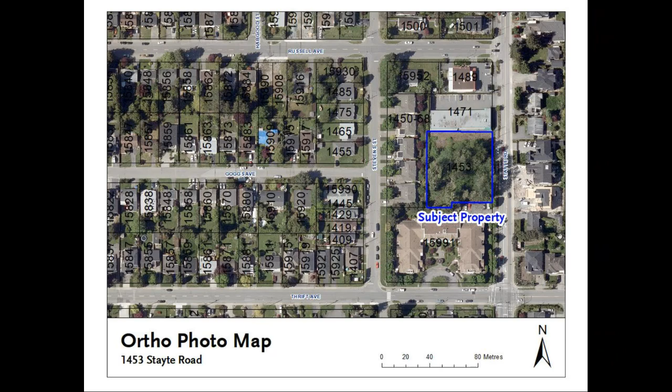The project has a bit of history to the proposal. There was previously a 4-story apartment-style building proposed on the site with, I believe, about 50 dwelling units. That proposal required a zoning amendment, which was ultimately not supported by council, and I believe the applicants will go through the specifics of that project in more detail. The application now is for a 23-unit townhome development with 2 parking spaces per unit, plus 3 visitor spaces.

As a quick snapshot of some of the details, the subject property is within the Urban Neighbourhood land use designation of the official community plan. Within that designation, the OCP recognizes low-rise apartment-style buildings as well as townhomes. It also recognizes density of up to 1.5 FAR, or floor area ratio, in buildings up to 4 stories in height.

The current zoning of the property is 1-unit residential, or RS1, and the rezoning application would create a property-specific comprehensive development zone. In addition to the rezoning, the project is subject to a major development permit, which requires consideration of the applicable development permit area guidelines, which help regulate the form and character of the project overall.

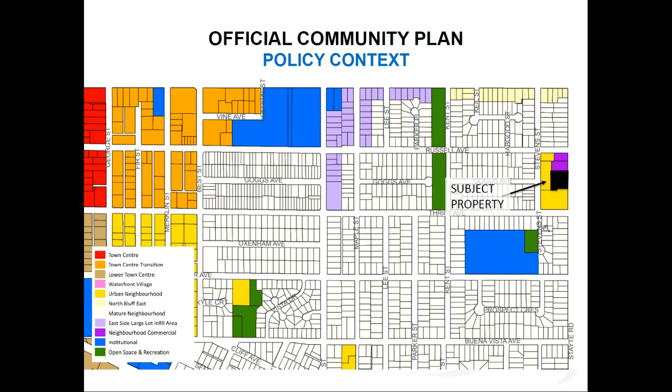This image gives you an indication of where the property is, again off of Stayte Road, north of Thrift Avenue and south of Russell Avenue. You can see it illustrated there in black, but underneath the black is actually the yellow land use designation, which is the Urban Neighbourhood land use designation of the official community plan. This designation is intended to support higher density forms of housing than what you might see around the periphery and the lower profile mature neighborhoods that are more characteristically comprised of single detached homes.

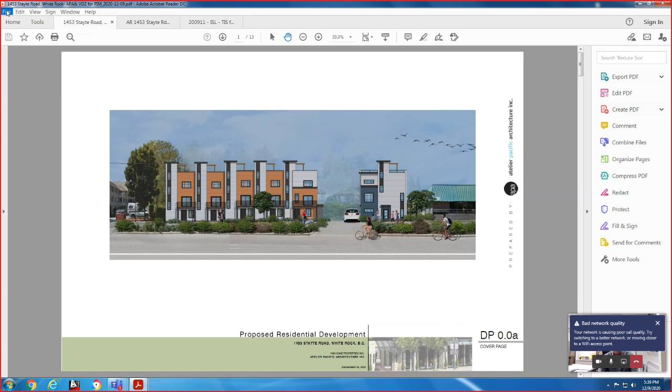Well, thank you everybody. We have representatives from Vanhome Properties, the developer and applicant, as well as Gloria and myself from Atelier Pacific Architecture, and Travis Martin from the Landscape Architecture Company. Let me go to the next slide.

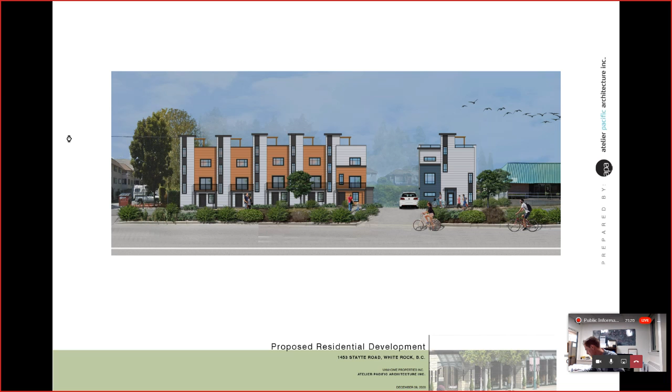There's the next slide. So this slide is just showing the previous application as well as the current, and a comparison between the two. The previous application, as was mentioned by Greg, was a 4-story condo building with an underground parkade, with an entrance off of Stayte Road. It was an L-shaped building with an outdoor courtyard green space in the southwest corner. The project height was 4 stories, 45.5 feet, measured from lowest grade.

That compares to the current proposal of townhouses, which is a 3-story element of 33.8 feet, with a rooftop deck proposed for each of the units. There's a stairwell that goes to the top, with a height of 39.5 feet. There were 50 units proposed for the condo building, and the unit density has dropped down from 62.7 to 29, now down to 23 townhouse units. The townhouse units all have side-by-side garages, and we're also proposing three visitor parking spots.

The floor space ratio allowable was 1.5. The original project was 1.41. The current proposal with the townhouses is under 1, at 0.96, a differential of about 1,400 square meters in buildable area.

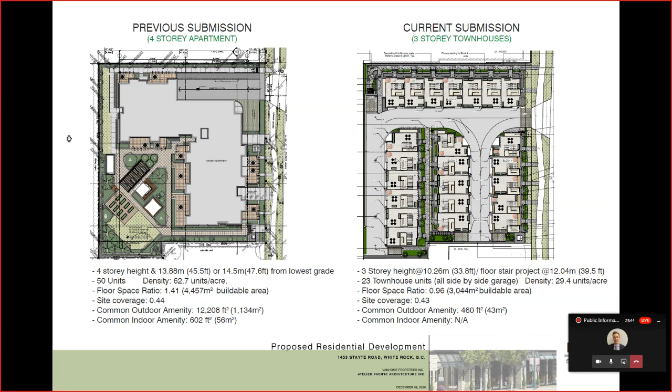The previous one had about 600 square feet. This was an option we did after the application, in response to some concerns from the neighbors to the west. We did have rooftop decks on all the blocks, but we're proposing to move the rooftop decks for block 3 back towards the east, which reduces the sound impact on the neighbors as well. The stairwells actually act as a bit of a block to sound.

This is just a quick site section showing what's happening with the site grades and the building mass. They are 3-story townhouses with one element, the stairwell, to access the roof deck above for exiting. At the property line there's an existing hedge on the property to the west, and our proposal augments that with a fence and an additional hedge.

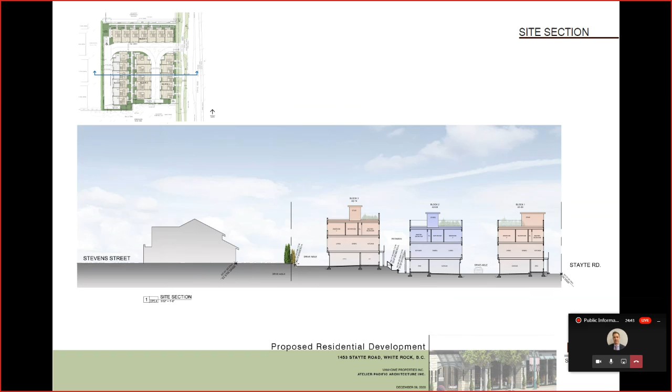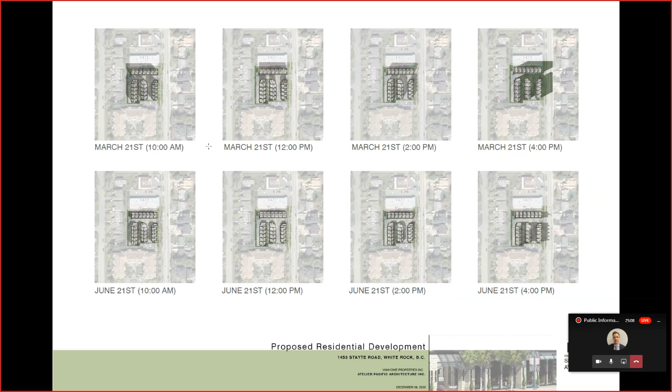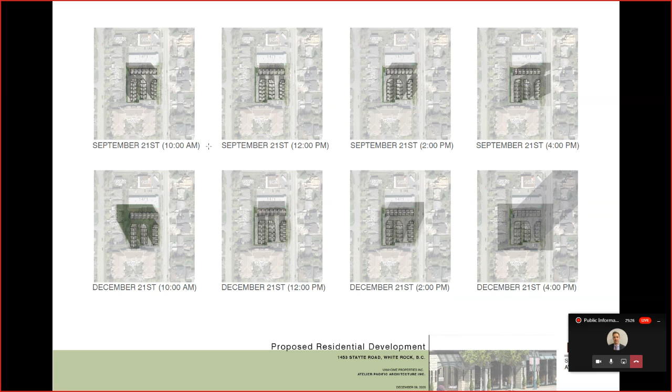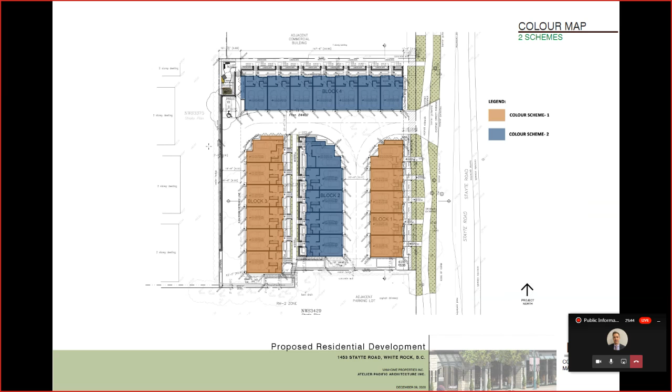This is just to indicate the color schemes. There are two proposed: blocks 1 and 3 have color scheme 1, more of a natural wood tone, and blocks 2 and 4 have the blue scheme. This is color scheme 1. All the materials are cementitious board and painted, so they're a durable, non-combustible finish that can be painted to any color scheme. The massing you can see is 3 stories.

You can see, for example in the west elevation, the garage doors, and then the 2 livable levels on top of that, plus the rooftop decks. There's a bit of a trellis element as well.

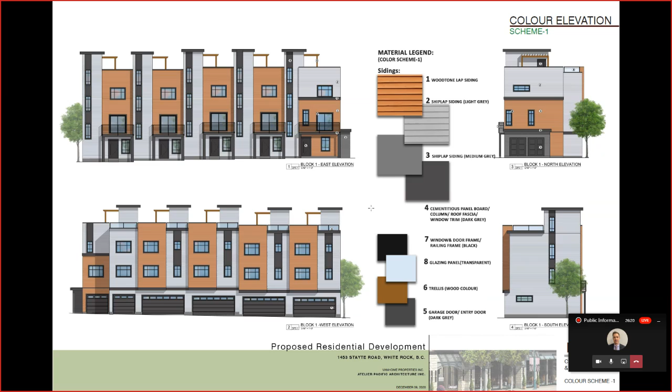And this is color scheme 2, using blues and grays. There's primarily 3 body colors with some trim colors added to that.

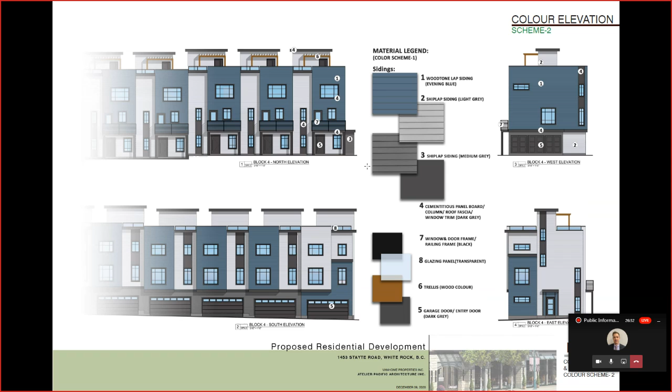This was actually a 3-story project with a roof deck that we did in the city of Langley. We did 2 phases in one project, and this is an additional one.

It's a 3-story scheme. The first level is the garage, the tandem garage in this case, and then the second level is the living functions, the living room, dining room, kitchen, and a powder room, and stairs, and then the bedrooms on top, and then a stairwell that gets up onto the roof deck above.

And this was another image from the street, as well as an artist rendering of what the intent of the roof deck was for. It provides them with a private and semi-private usable space that's secure for the individual units.

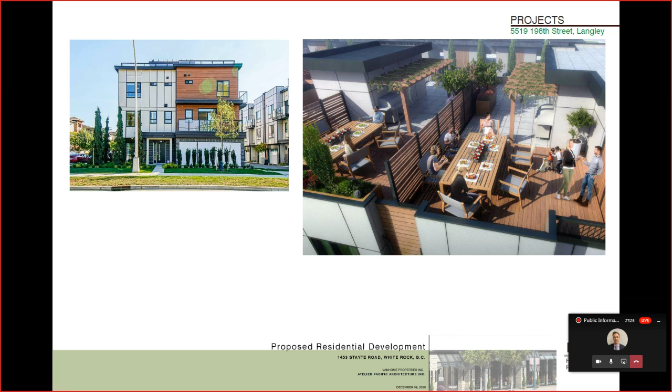This is a streetscape from Stayte Road. The existing streetscape is on the top. It was treed quite heavily. The streetscape on the bottom is showing the townhouse units, and then the image of the crossing onto the site you can see in the background.

There was a set of internal trees that would have to be removed to accommodate the development, and so you can actually see the house and the hedging back at the property line between the buildings here.

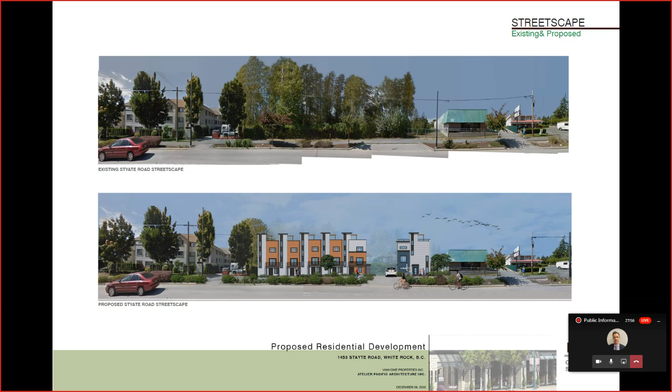And I'll turn it over to Travis to talk a little bit about the landscaping. Okay, thank you, Brian, for the introduction. I'll talk generally about it.

As it was mentioned, we've adjusted this design quite heavily to bring it much more into scale with the neighborhood. So they're 3-story townhomes. The townhomes face Stayte Road, so there's 5 units facing Stayte Road here. And then they're also facing a walkway along the north against that north commercial there. And then there's 2 that are inward facing on an internal walkway system that you can see down the middle there. So these houses are against the commercial to the north.

They're really sitting back from the west lot line to give a bit more breathing space to the duplexes along that west property line. And then there's quite a bit of space on the south to the larger 3-story residential, as there's a parking space out there as well.

Each unit is ground oriented and they each have private space on the rooftops. In terms of planting, we're using a mix of trees - beech, acer, maple, cedars, and pine trees, and magnolia - kind of mixed throughout the project.

There is an outdoor amenity space in the northwest corner that's linked along that connecting pathway. It focuses on a small social gathering space and mostly a space for toddler play, a small playhouse and sandbox. It's a very well-oriented space, facing south and west, so it'll get sun from late morning through the afternoon, and it'll be a very comfortable place to spend time.

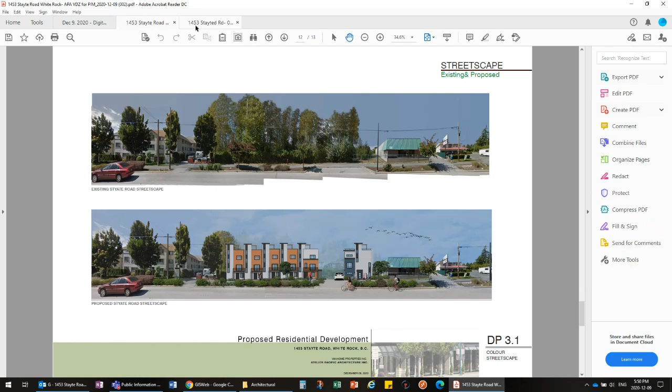Let me put the site plan back on just for ease of reference, to save us swapping between sharing screens. Brian, if there's a page you want me to go to, just let me know. Yeah, it's just the DP 0.1, the roof plan.

Okay, so in terms of privacy, what we did was pull the roof decks back from block 3 so that the western portion of the unit is not a roof deck, it's just a roof. There'll be a 3.5 foot barrier between that stairwell and the next stairwell. So the roof deck function is actually to the east, so it's not really looking to the west anymore.

I think the only thing we'd have to look at is how to address the units that are south facing, and perhaps the westerly unit of block 4. But I think we take the same strategy to figure out methods of pulling the roof deck away, so you'd have to look over the edge of the roof rather than coming right to the edge. I think we can do that quite easily.

Next comment: the shadow report shows an attention to detail that respects existing owners - I think that's just a comment. There's also a comment: we need affordable housing and green spaces in White Rock, and this fits with neither. Did you want to speak to your target market and perhaps any comments on affordability?

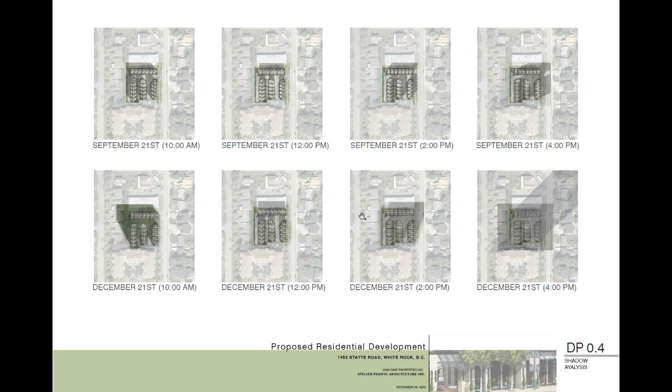Thank you, Brian. I do see some other related comments. Can you speak to parking? There's a question here: are they double car garages for all units? Do you want to speak to that? I don't know if it's in your presentation, maybe you can speak to it in the site plan.

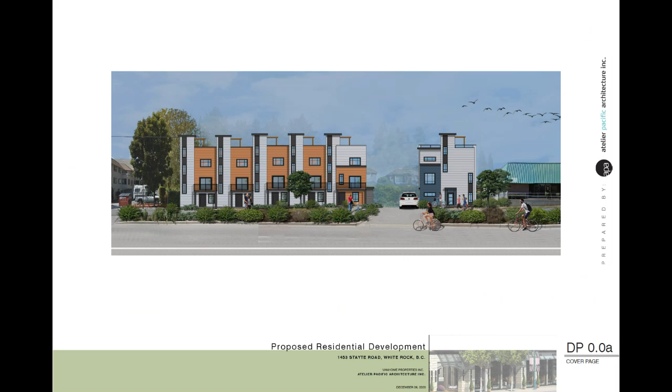It's on DP 0.0. There's a note in the comparison between the two projects. It's the next sheet, actually. There you go. It'll say 23 townhouse units, all side-by-side garages.

Okay, and just for the benefit of the audience, you can see the drive aisles in the design with the 2-car garage accessed off of the drive aisle, with landscaping treatment off those drive aisles, where there'd be more of a traditional front entry to the units. The unit sizes are around 1,421 square feet average.

That gives you an idea of the size of the home. We actually had that question, so I just published that comment as well. There's a concern about the lack of green space, the only green space being in the back corner. Did yourself, the architect team, or Travis from the landscape architecture firm want to speak to the green space that's proposed?

Sure, yeah. With townhouses, let's see, where's the landscape plan? Here it is.

With most townhouse projects, there's not a huge amount of green space involved, but we've tried to create a well-connected neighborhood component here. So you have nice, safe walkways, and spaces for kids to play hockey and things like that on these roads, which won't be getting much traffic.

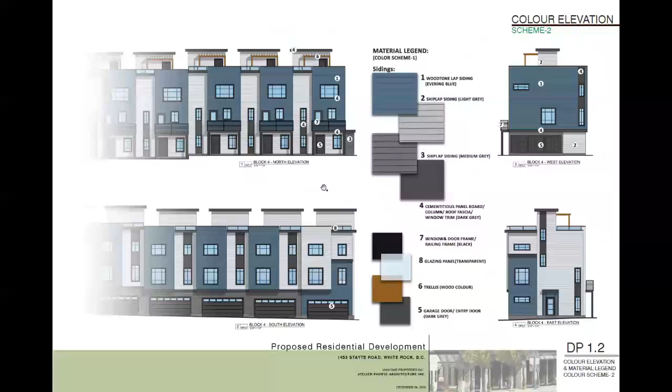I'm going to try the next comment — there's a request to see the elevation drawings again. I can throw it on the screen if the commenter has a specific question regarding the elevation drawings. I'll try to find it first, and maybe we can get a follow-up question there if there is one.

I'll publish some of the general comments that are being raised in reference to the pine trees. There's a comment suggesting the developer should increase the setback on the west side for fire separation.

Did you want to speak to that at all, Brian? Typically any setback that's less than 5 feet would become an issue in terms of sprinklering and non-combustible finishes. In this case, we're still using non-combustible finishes, but we're set back quite a bit further than that. So I'm not sure what more setback is needed. It's already pulled back, even further than the required building setback line.

And just for the commenter on that particular question, the city's building officials and fire department will also be reviewing this application to make sure that the fire code and BC building code requirements for fire separation are being met. So those things are being looked at as part of the internal technical review.

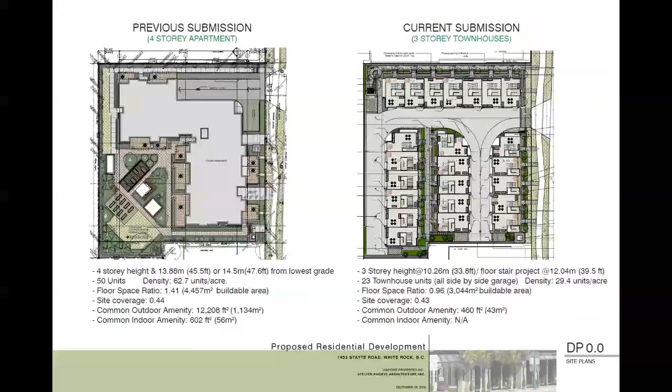I'd like to be able to read the drawing, but my eyes are so bad. Probably best to go to drawing 0, for the main site plan. Just bear with me for a second here. Sure, and I didn't mean to throw you on the spot there.

So it's about 14 feet from the north, 4.5 meters, and 9 feet 10 inches on the south, so 3.5 meters. There's a 6 meter minimum setback on the west, and on the east a 3.5 meter setback from the property line as it exists today. The city is looking at a 2 meter wide statutory right-of-way to allow for future programming of Stayte Road, as there is a desire over the longer term to have a multi-use path for cyclists there. So the city is looking at a statutory right-of-way or potentially a land dedication along Stayte Road.

Comment about the storage of, I think, flammable materials in the garage, maybe just expressing concern. Question: has the builder or contractor been chosen? Not yet, I don't believe so.

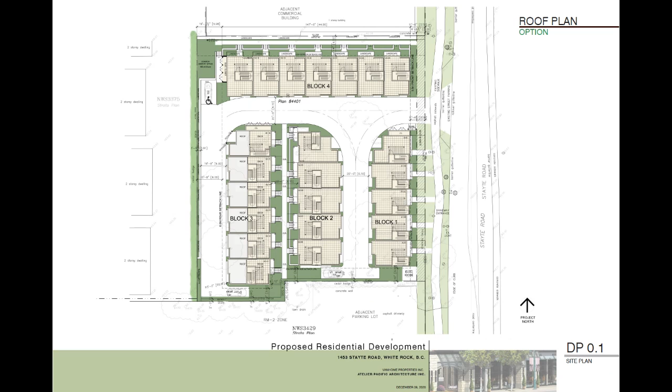Question about if the applicant can show the east elevation showing the west block. Do you have that in your package here, Brian? East elevation, the west block - I don't think it was in this one, it was in the original DP package. There we go. Well, it's block 1, right? Did you say it was east elevation of block... east elevation showing the west, I think the one facing the duplexes.

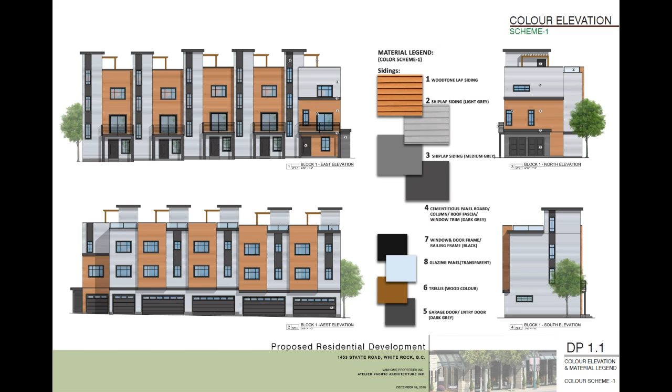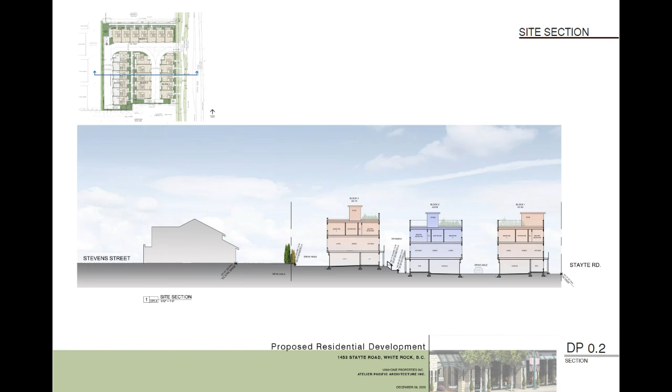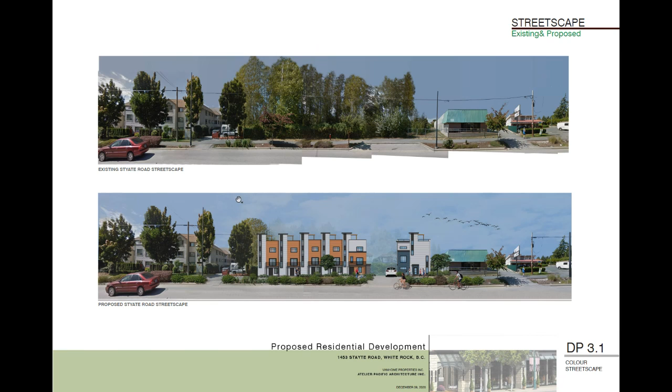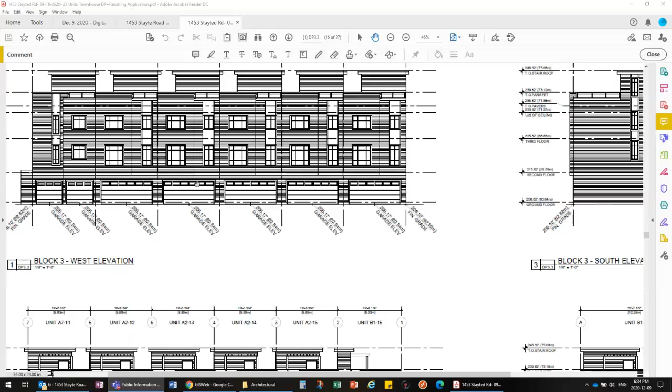Sorry Greg, it was the east elevation, which building block? The question is, can they see the east elevation showing the west block? So that would be internal between blocks 2 and 3? Yeah, that's what I'm understanding, the internal one. I don't believe we have it in your package here. Just if the commenter can bear with me, I'll try to find it. Yeah, it would be drawing DP 3.3 in the DP package. Okay, so here it is, just for the public. It didn't come with a specific question, so I don't know if the commenter has a question, but that's the internal elevation - I don't know if you want to speak to the facade design within that, the west elevation.

So here's the west elevation of block 3. You would see the stair entry point at the lowest level and a kind of entry porch with a patio and a deck area above, basically massing that way. It's a 3-story element with a 4-story raised portion for the stairwell on the roof. You can see it in the distance with the trellis element.

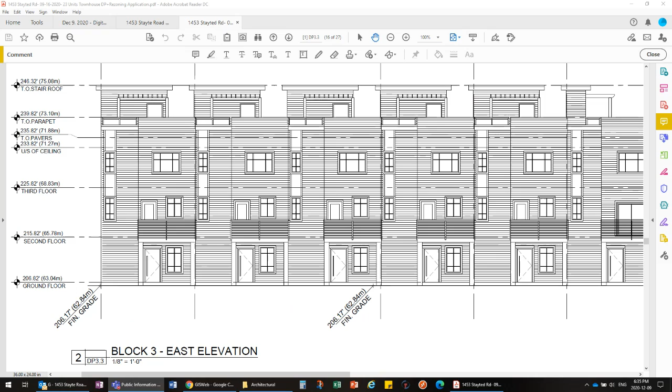There was a submission received, and I know members of the public who were involved in preparing it are in the digital room tonight. I wonder if you wanted to speak to the layout as it relates to a potential east-west orientation of the mid units.

Let me find the site plan to present it. I think it would be worthwhile to respond to this since it's come up. We saw a sketched layout showing blocks 2 and 3 oriented east-west, but to accommodate that there would be a resultant loss of about 3 units. It was a 50-unit scheme, and the developer's gone all the way down to 23 currently, so losing 3 more would be detrimental to the project.

Question: can the public get a copy of the presentation PDF? Yeah, happy to. Tonight's presentation is being recorded, so it will be available, but if the applicant is comfortable sharing it, I'm happy to provide it. We can send you a PDF of this package.

What would the anticipated completion date be if the city approves this? Maybe give a rough sense of the timing post approval. Even after making it through rezoning and development permit stage, we'd still have to prepare building permit drawings, which usually takes about 2.5 months, give or take. Then we'd submit for building permit, and that approval process can take 6-7 months. We'd have a contractor price it out, which takes about a month and a bit, and then we'd issue a contract to start construction. Depending on phasing, it could take a couple years to build the blocks out. If the market was healthy, they could literally be built out in the same time—we've had multi-block projects built all at once rather than phased, but it really depends on where the market is at the time.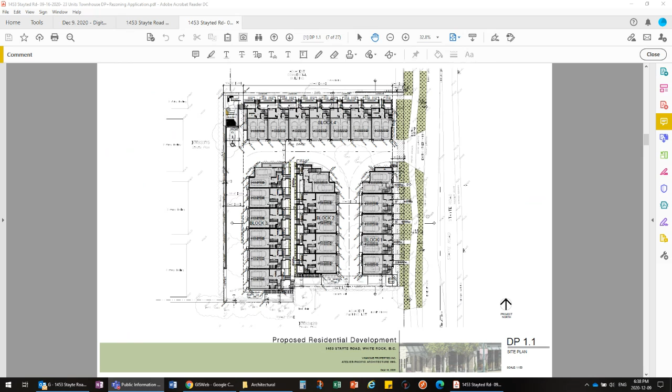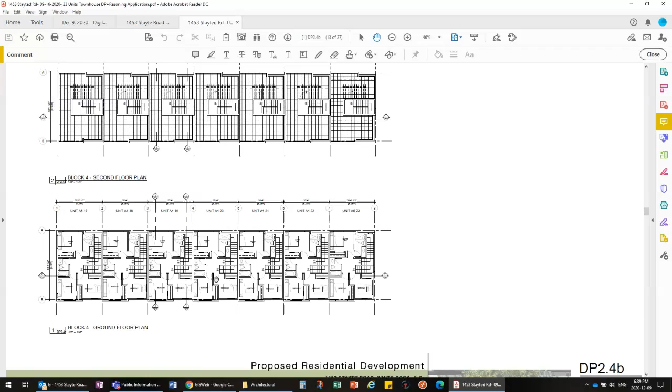There's a question: can you show block 4? I'll go over to block 4, the northern block. I'm not sure if the commenter has something specific they'd like us to speak to. Hopefully you can see this—second floor, first floor with the parking and garage, ground floor, and second floor again. I think that might be mislabeled—this is the second floor, and then the rooftop. And then these are the elevations.

I think there may be interest in how the building interfaces with the north elevation—it's a similar design to what we illustrated in block 3. It also shows how we're working with the topography of the site. There's a gradual slope up to the northwest corner, so we're stepping the building where needed rather than digging the site out to accommodate the floor plate. We've actually stepped the building in a couple of spots.

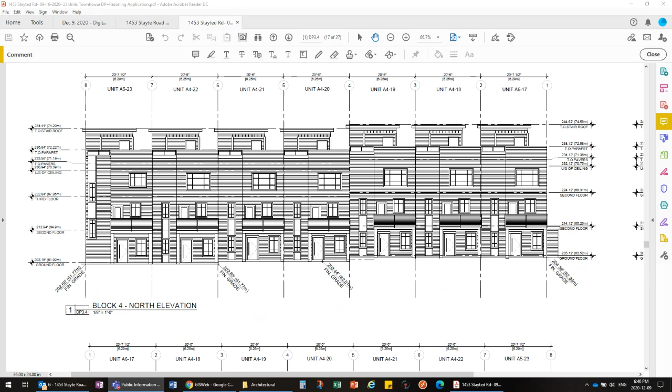There are comments about the 3rd floor coming in—concern about 3 stories being too tall, and looking again at the feasibility of a 2-story design with rooftop space. Can you speak to that? There's just been some comments about the height—maybe if you were to drop a story, what would the implications be? You'd have to basically combine the bedrooms with all the living spaces, kitchen, dining, and living into one floor plate, which would end up being essentially a one-bedroom apartment.

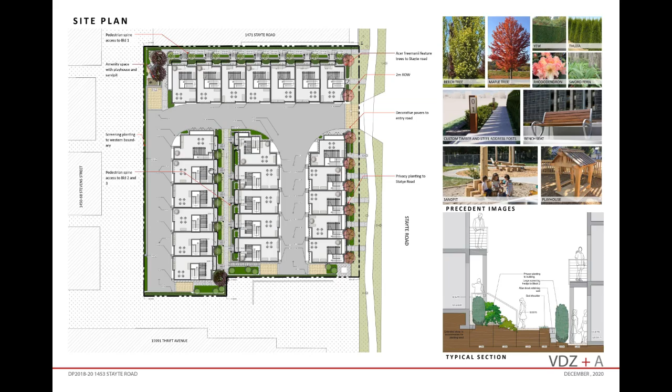What I'll do is start the overview of next steps, and if we get questions as we wrap up here, we're happy to take any last minute questions that you have.